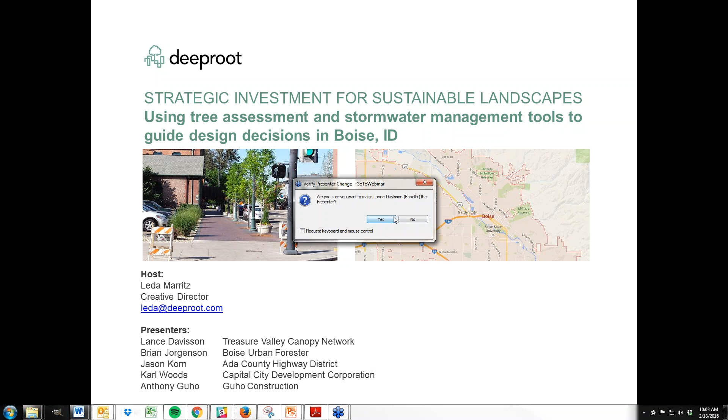The Treasure Valley Canopy Network is a unique partnership in Southwest Idaho where urban forestry and city planning professionals are working together to use an urban tree canopy assessment to inform strategic and sustainable urban forest investments in local cities. Today, we welcome 5 partners from the network. We'll start with a presentation from Lance Davisson, who coordinates network activities at a regional level. Then we'll hear from Brian Jorgenson, Jason Korn, and Karl Woods, who are working together from a city planning perspective within the city of Boise. We'll end with a presentation from Anthony Guho, who manages a local construction company that is installing sustainable urban forest infrastructure throughout the city. After that, we'll have that question and answer period I mentioned earlier.

So now I want to welcome Lance Davisson. Lance is the owner and consultant for the Keystone Concept and has been coordinating Treasure Valley Canopy Network activities since 2012. As you learn throughout the presentation today, the network is involved in a number of activities in addition to informing strategic investments in sustainable landscapes, including energy conservation, clean air, and urban tree canopy links to human health. Lance, take it away. Thank you very much, Leda.

So I get the opportunity to lead off for all of our great partners that have joined this presentation today and give you an idea of where Boise and Idaho's Treasure Valley are located. This is a picture looking from the foothills down into Boise. We have about a 16% urban tree canopy in Boise. If you look, we're located in southwestern Idaho, right on the border with Oregon.

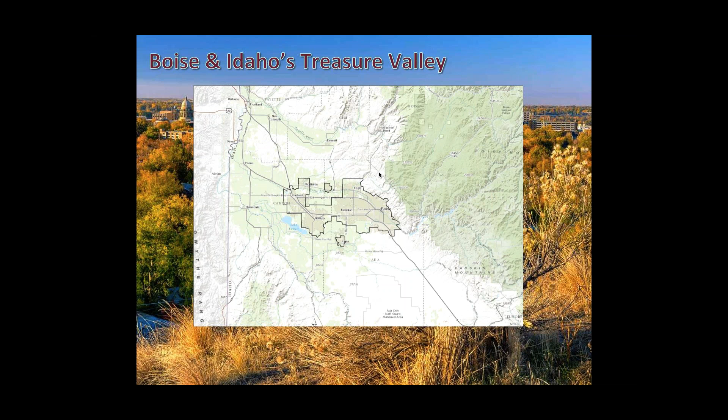If we zoom in a little bit, we have 9 different municipalities within Idaho's Treasure Valley in 2 different counties. The population of this area is around 600,000. Most of today we'll be focusing on the city of Boise. So this is zooming into the city of Boise, and then we'll really dive down into downtown, which is right in this area.

So first I wanted to expose you a bit to the Treasure Valley Canopy Network and how everything kind of evolved. Back from 2009 to 2011, a group of partners were generating ideas around what benefits urban tree canopy provide to our communities in the Treasure Valley, and they recognized that we didn't really have that data here locally. So led by Idaho Department of Lands and their vision for conducting an urban tree canopy assessment and combining that with ecosystem services data, we wanted to help our communities inform strategic urban forest management on the ground.

So together with all the partners, Idaho Department of Lands secured funding from the U.S. Forest Service. And once that funding was secured, we were able to bring on a few consulting companies to help manage the project. We brought in PlanIT Geo, a geospatial assessment firm out of Colorado, to help do the urban tree canopy assessment. By 2013, the assessment was complete, and this assessment also brought in all the data from a region-wide iTree ecosystem services analysis, developing over 21 gigabytes of GIS data, urban tree canopy data, and tools that can inform not only regional urban forest management, but also each of our cities.

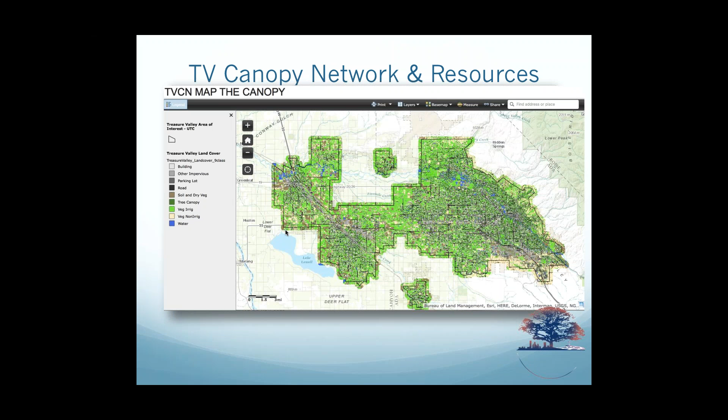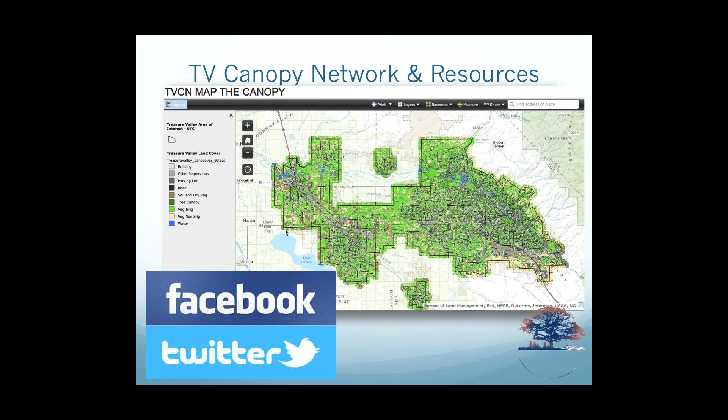At TV Canopy. And we'll continually update this tool for our communities to use and hopefully inform similar ideas around the country. A few more resources that we've created to help community leaders understand the benefits of urban tree canopy, and citizens, are some focused infographics.

This one is around the benefits of energy conservation if we plant our trees in the right location. We have a look here at some of the ecosystem services provided. This is at the Treasure Valley regional level. And then we also took a focus on urban tree canopy and air quality.

And how that benefits human health. So to wrap up here, the key pieces for our network are the core group of partners. The partners you see here have been involved since the beginning. It's important to understand that they're public, private, and nonprofit partners, which serves us well as we grow.

We've been fortunate to become engaged in some urban renewal work, and have partnered up with Idaho Smart Growth and the local green building chapter. We've also now started to form unique partnerships with some economics groups. We've been able to partner up with Deeproot, who provides the technology to actually implement this strategic urban forest investment on the ground. And also you'll learn a little bit about some of the construction companies that are doing great work here locally.

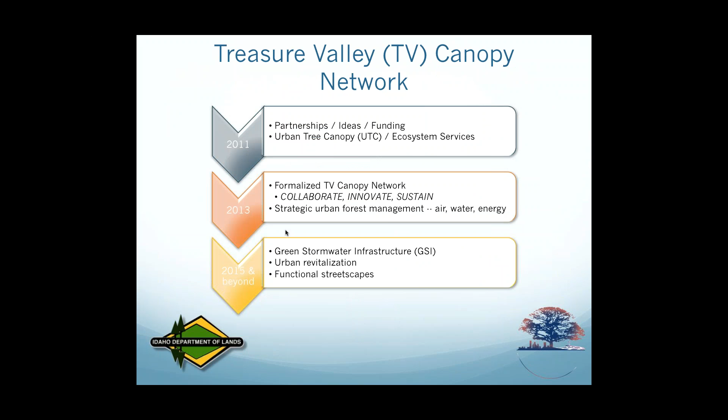So now, to wrap up here, we're now going to step into looking at a local level how we're informing green stormwater infrastructure, urban revitalization, and really that development of functional streetscapes.

So it's my pleasure to introduce Brian Jorgenson. Brian is Boise's city forester. He's been a city forester since 2007 and is a certified arborist. He manages a program that was established back in 1952. They have about 40 to 50,000 public trees and about a million dollar annual budget. Brian will help you understand a little bit more about our downtown streetscapes.

That's correct. Thank you, Lance, for the introduction. I'm going to spend a little time, just to finish out this slide here. Could you go back one, Lance, please? I'm going to spend a little time just talking about the downtown tree canopy.

We've got about 2,500 public right-of-way trees downtown. The urban tree canopy in the downtown portion of Boise, the neighborhood downtown of Boise, is sitting at about 18%. That also includes parks. The urban core, when we exclude one of Boise's biggest parks, Julia Davis, and the greenbelt along the river, we come in at about a 10% urban tree canopy. That's what UTC stands for. Okay, you can go ahead now, Lance.

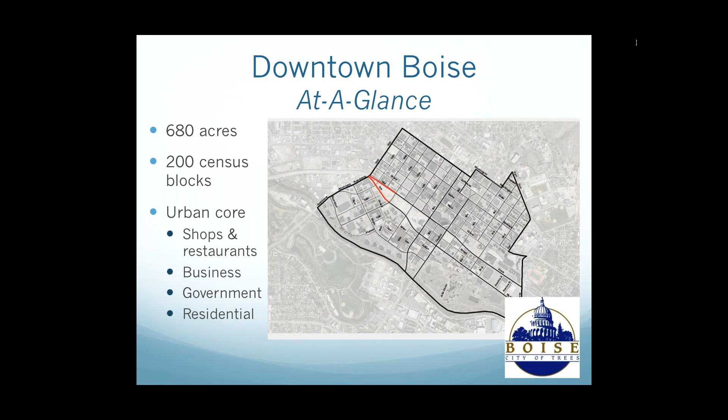So here's zooming in a little bit from Lance's City of Boise look, zooming into the downtown core, the downtown neighborhood. It's about 680 total acres, 200 census blocks. The core consists of lots of shops and restaurants, and of course a lot of business, commercial. It's where most of the city government and the state government operates out of downtown Boise. And there's been a big push in the last 10, 20 years to reintroduce some residential living downtown. Go ahead and click to the next slide then.

They're highlighted in green. I'm layering different things on the map here. So highlighted in green, you see in the lower right corner is Julia Davis Park. It's one of the oldest parks in Boise. And along the lower left of the downtown area is the greenbelt. There's a few other smaller pocket parks and small parks scattered throughout downtown as well. We excluded the urban tree canopy for those parks because it's such a big chunk of it.

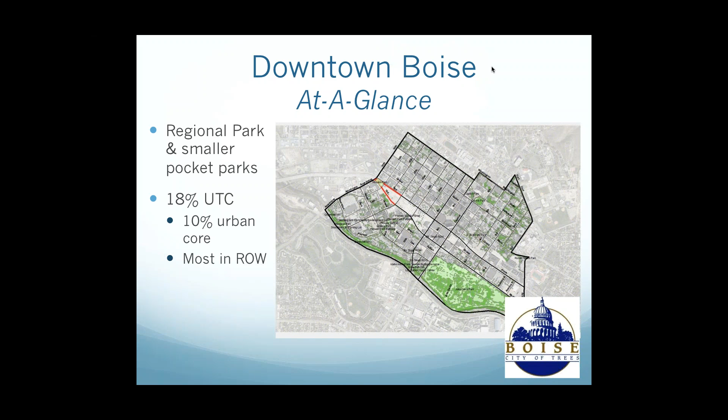I just wanted to look at what the canopy value is in the urban core, where the downtown trees, most of it is in the public right-of-way, and I see Lance has advanced the slide here again. The dark green is the tree canopy, at least as it looked in 2011. So you can see definitely there's a big portion of that in the parks and along the river. And most of the stuff in the urban area is on public right-of-way, which falls under the City of Boise's tree ordinance. The trees in the public right-of-way are managed by the City of Boise, kind of in partnership with the adjacent property owners.

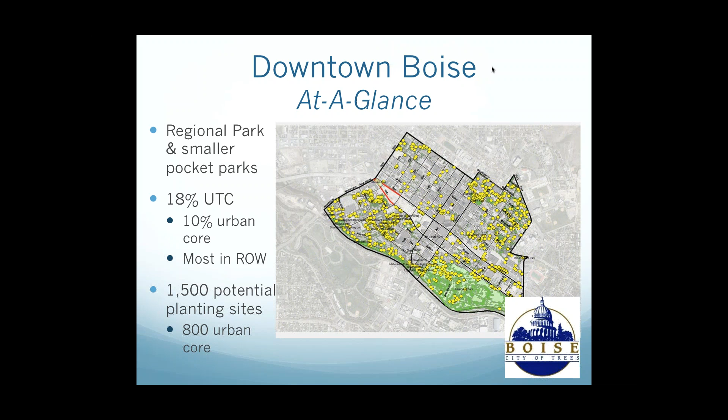On the next slide, we're going to add one more layer. These are the potential planting sites identified during our urban tree canopy analysis in 2011. There are about 1,500 potential planting sites total, with about 800 in the urban core. These are in existing green spaces as of 2011 when the aerial photography was done. It does not include areas that are currently gray infrastructure, like sidewalks and parking lots, where there might be some opportunities later on too.

Okay, you can go on to the next one. So just to give you a little bit of history of downtown trees and downtown tree canopy, that'll hopefully help lead into some of the other aspects of our talk today.

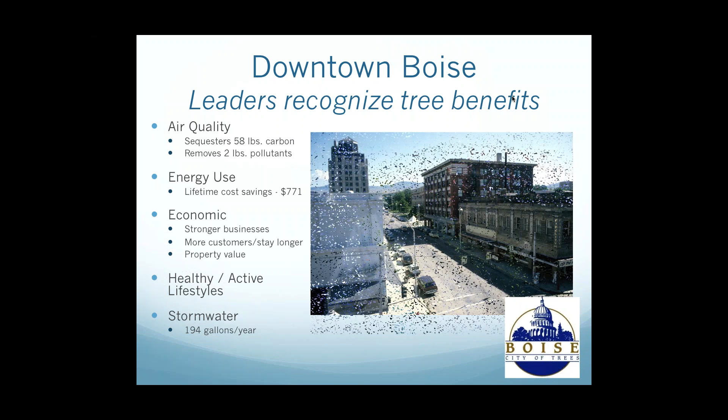Okay, you can go on to the next slide. So here's a picture of a portion of downtown Boise, South 8th Street, in the 1970s, and then through Capital City Development Corporation's foresight, working with community forestry at the time - this all took place before me coming to the city - you see the transformation of this particular downtown streetscape.

It's made a huge difference in the livability and walkability of downtown Boise. We have a very vibrant and alive downtown, and I think our current leadership at City Hall has really started to recognize this. At about 2010 to 2013, I was asked by the mayor's office what we could do to create bigger trees downtown. The answer was pretty simple: we need more soil volume. We need a place for tree roots to grow so they can get what they need to grow to a more significant size and offer those ecosystem benefits.

That Lance mentioned, some of which are lined up on the left side - I won't go into detail on each one, however. The objective is to create a stronger economy, keep people living, working, and exploring downtown, and create a healthy and active lifestyle. Finally, the stormwater element, which Jason Korn will go into shortly, was also a very important driver of the canopy for downtown.

Okay, I think I have one more slide. So the objective here in creating a strong urban forest presence downtown Boise was to create a place for trees to grow, which would bring people and use suspended pavement systems like Silva Cell, DeepRoot Silva Cell, and our downtown core should make that happen. That's about all from my presentation.

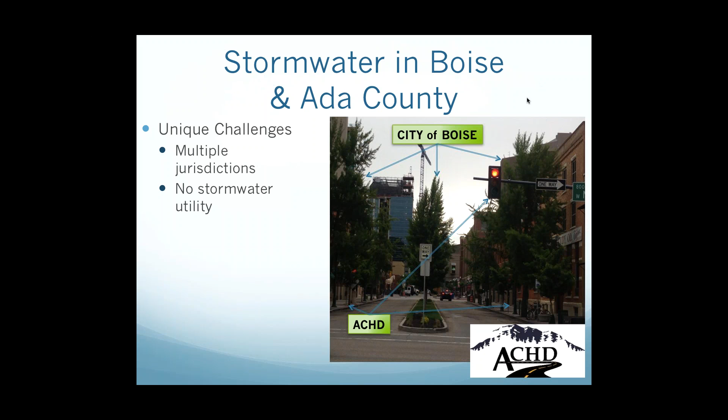Management of stormwater runoff from the Boise area comes from general funds, as we don't have a stormwater utility. Fortunately, there's a mechanism that aids in our collaboration: ACHD and the city of Boise, along with Idaho Transportation Department, Boise State, Drainage District 3, and Garden City are co-permittees under a Phase 1 MS4 NPDES permit, issued in 2013.

Our permit requires, similar to a lot of Phase 1 MS4 communities, on-site retention of stormwater and runoff reduction for new developments, with off-site mitigation where on-site retention is not feasible. It also requires construction and monitoring of 3 green stormwater infrastructure pilot projects and development of subwatershed plans.

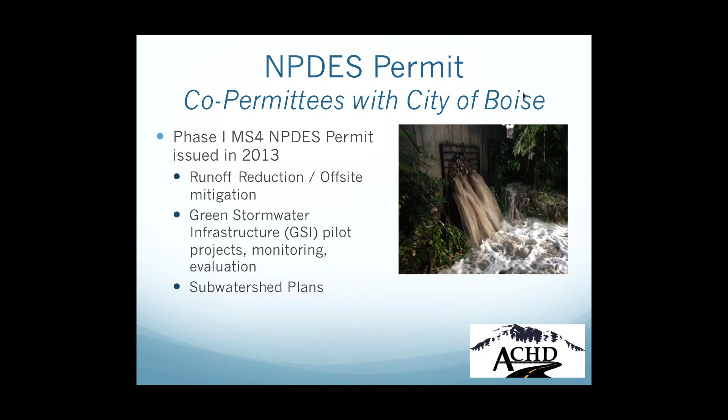In 2014, ACHD completed our toolbox of GSI techniques that we deemed appropriate for use in the right-of-way. These include bioretention, bioswales, permeable pavers, and stormwater tree cells or suspended pavement systems.

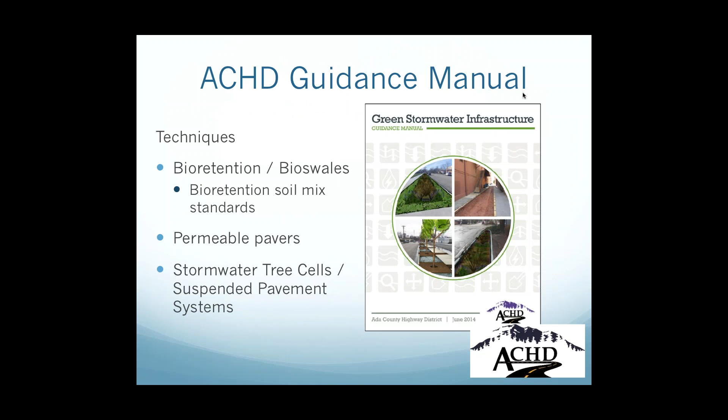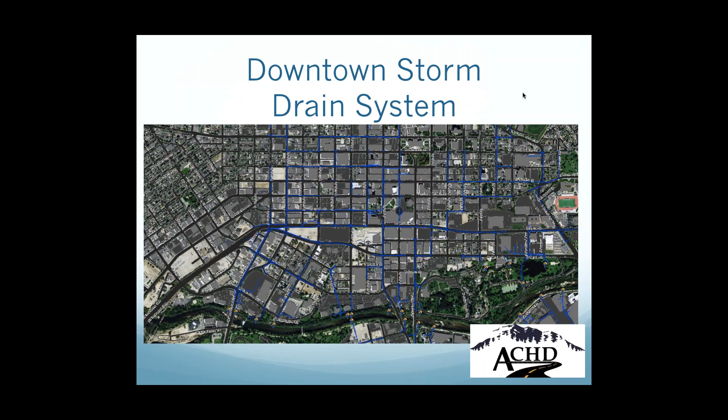Focusing back on downtown Boise, the storm drain system here drains a large impervious area of the downtown core. This runoff is largely untreated, going directly to the Boise River through a series of large pipes, mostly down the main arterial streets. Some of these pipe sections are already over capacity, and traditional stormwater treatment options such as retention and detention ponds are not feasible in the urban core, for obvious reasons of space and expense.

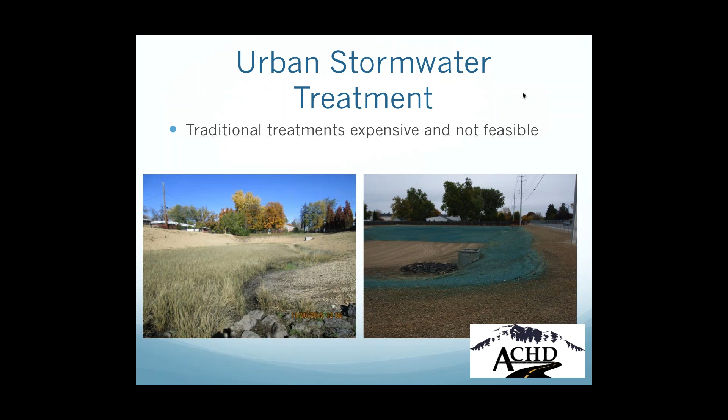Development densities for new developments usually limit on-site retention options for private developments. As we expected to see more installations of these stormwater tree cells, we felt the need to develop criteria to help guide the different scenarios we're seeing through the permitting process, whether they're agency or developer initiated, have a runoff reduction component, or are being used as part of an off-site mitigation requirement.

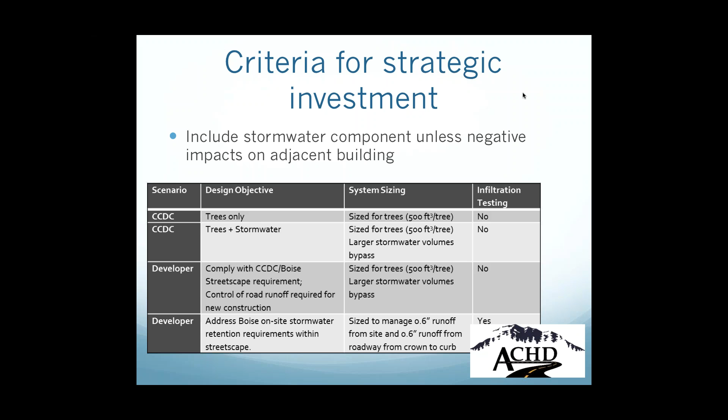CCDC is including the stormwater component on any new silva cell installations in their streetscapes where it's feasible and doesn't negatively impact adjacent buildings, whether they have foundation issues or basements. We generally don't install stormwater components in those situations.

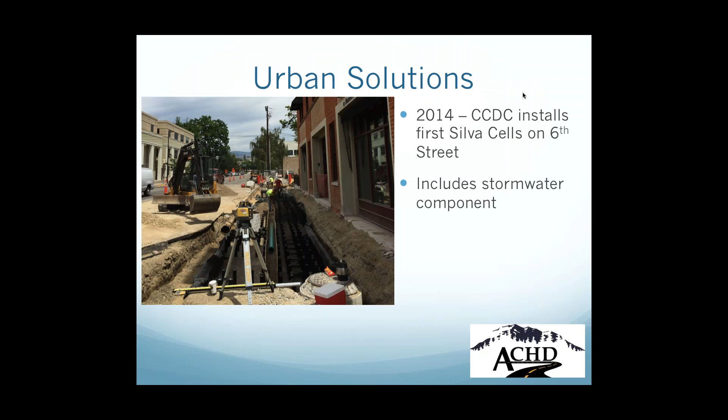Construction of streetscape improvements on 6th Street from Idaho to Main Street was completed in September 2014. These streetscape improvements included silva cell systems for enhanced growing conditions of the street trees, and also included stormwater components that allow us to achieve some runoff reduction.

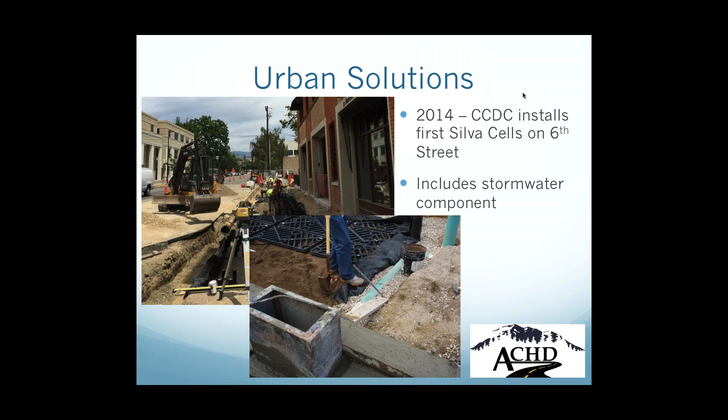This picture is a silva cell installation on Main and 15th that was installed this past summer. We're monitoring this installation as part of our GSI pilot project program.

This installation, and all the previous installations, do not utilize an underdrain. Rather, there's pretty well-draining material in the base of all these, so any overflow would simply bypass the drop inlets and move on down to enter the rest of the traditional stormwater system.

We're monitoring this—there's a camera mounted to the light pole that we're using to record storm events and try to identify what level of storm events might cause bypass of these systems. As of to date, we have not seen any bypass of the catch basins. They've taken all the water, so they're performing quite well, better than predicted, in controlling the runoff.

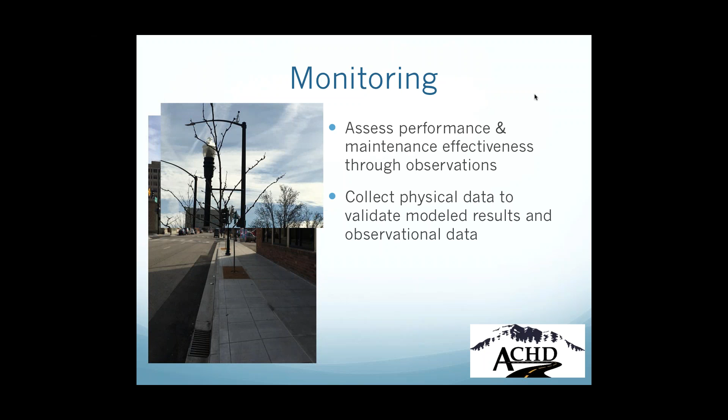We're also working with our co-permittees on developing 2 subwatershed plans in the downtown Boise areas. These are the Main Street subwatershed, which is the west downtown area, and the Americana watershed, one of our biggest storm drain areas, which encompasses a lot of the foothills, north end, and a big portion of downtown.

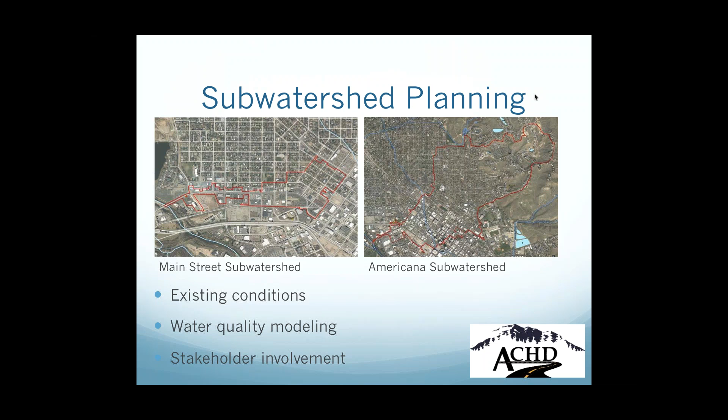In these watersheds, we're also conducting stormwater monitoring, with monitoring stations near the outfalls of both areas. As part of the planning process, we've developed existing conditions and stormwater models for this area that we can compare to our actual monitored results, and divided these watersheds into further sub-areas, utilizing stakeholder involvement in prioritizing these sub-areas for watershed improvement projects.

The goal of this subwatershed planning process is to identify locations where strategic planning and stormwater controls will improve water quality in the Boise River. We intend to use this information to help guide the further use of green infrastructure techniques and sustainable landscapes in the downtown core.

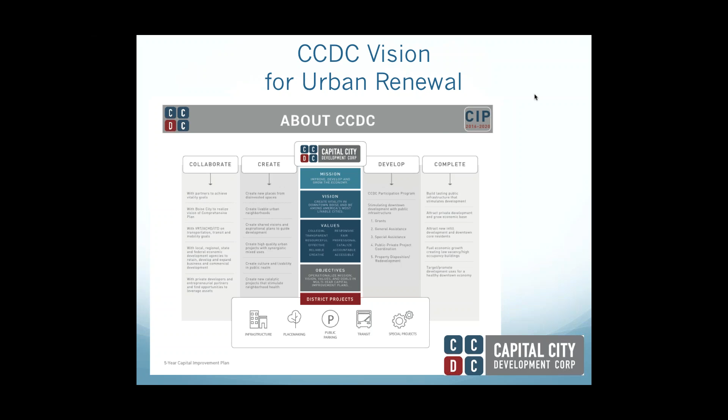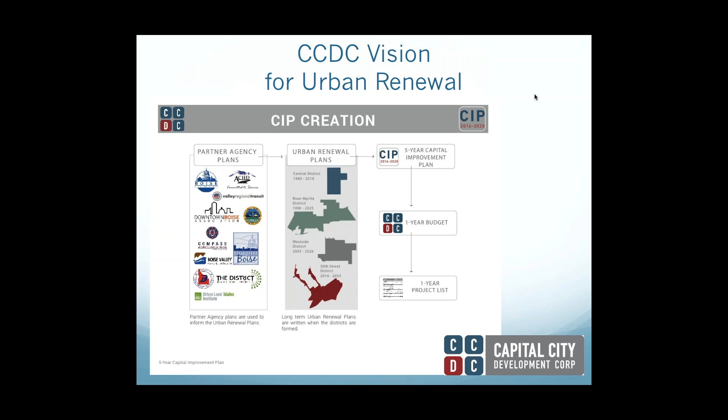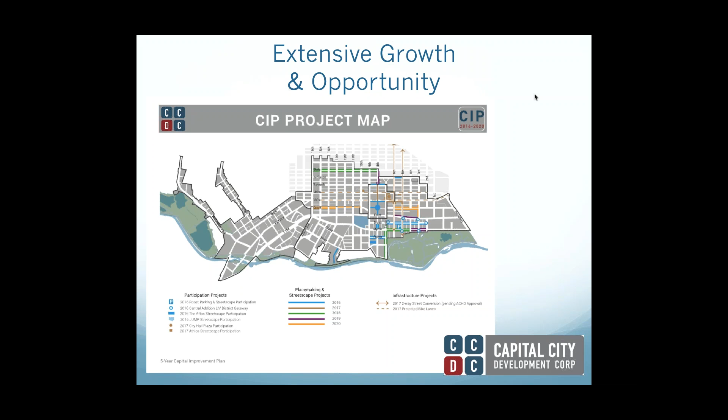So we work to improve downtown infrastructure. One of the ways is repairing and widening sidewalks, adding amenities like trees, benches, and streetlights, which strengthens downtown Boise's vitality, beauty, and promotes economic development. This is a bit of a case study of a streetscape this past summer in the River Myrtle district.

So we work with design professionals. In this case, it was Jensen Belts and Quadrant Consulting to work with partner agencies, stakeholders, business owners, to develop designs for streetscape improvements that work with everybody's needs. Once those designs are figured out, we get approvals and we go out to bid.

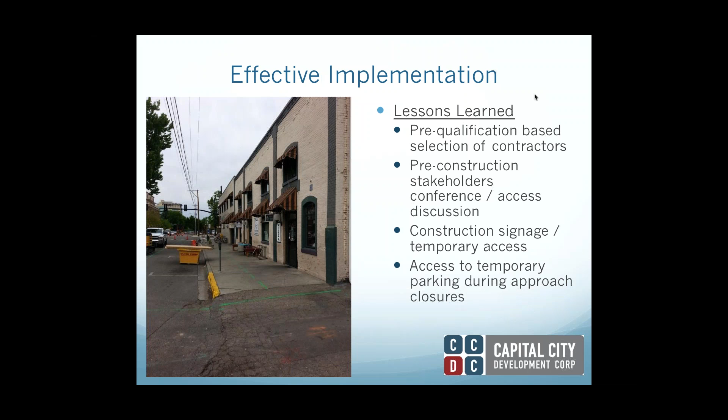One of the things we have learned in the past couple of years with the introduction of Silva cells is we've gone away from an open bid to a pre-qualification based selection of contractors. So we develop a pool of contractors that bid the work to, because it's complicated. It's downtown. You've got a lot of moving pieces and parts.

So once we get those contractors on board, we work with property owners, stakeholders, business owners to discuss schedule to make sure that their access is maintained to their businesses, to make this process as pleasant and the least disruptive possible.

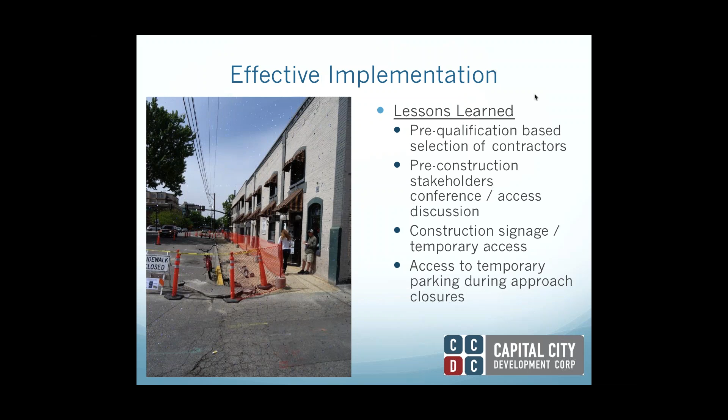So you can see in this case, demo has started. Guho Construction was our contractor last summer. They've already started demo, and immediately they get up a safety fence and they grade out the material in front of the businesses to maintain access and to keep things functioning while they do the work.

This has been critical. They go out every morning, talk to the business owners, let them know what to expect for the day and for the week. They provide construction access signage, as do we, just to make sure that everybody knows what's going on and to try to make it as pleasant as we can for everybody.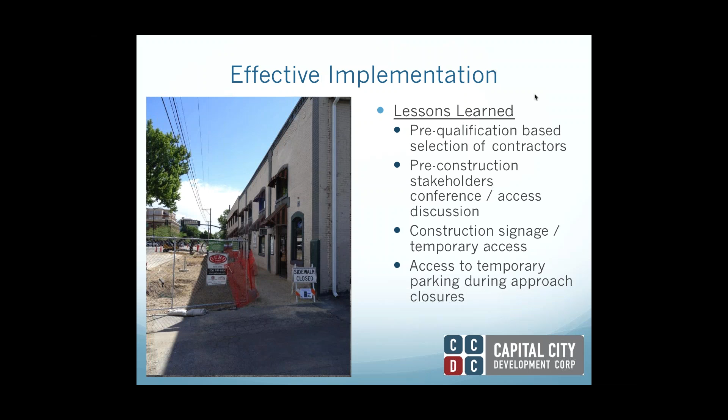Also, sometimes we run into parking lot approaches, and so we need to work with those patrons to make sure that they are aware they have different entries in, or even alternate locations in some cases.

You can see at this point that Guho is doing some fine grading. They're getting ready for the pavers, and so now we have closed this off. We have signage where we're moving patrons through different exits and entries of the building to maintain access. So we keep moving and fine-tuning and modifying access as the project goes along. Let's go to the next slide.

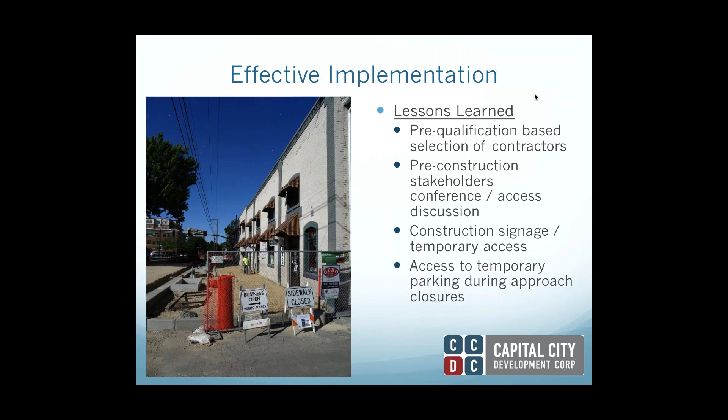From this point, usually just a couple of days, they get all the pavers down, and these guys really fly through this stuff.

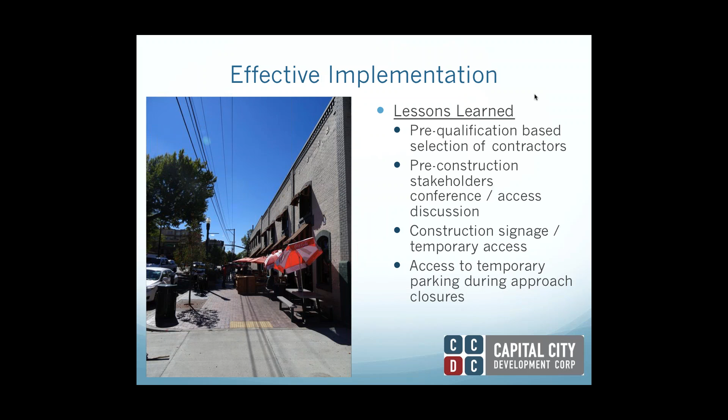When the project is all done, in this case particularly, we were able to increase the streetscape width by 8 feet. On the first slide, you saw an area that didn't have trees, was in disrepair, and didn't have lights for safety or placemaking. Now you have a nice big public space that's highly utilized.

It's very active, it's safe, and it's encouraging people to come down to this part and enjoy these businesses. Let's now hear from Anthony Guho, who was instrumental in the construction last summer. He's a 4th-generation construction manager with Guho Corp, and he's become the resident expert of Silva cell installations, having done a vast number of them. Take it away, Anthony.

Thanks, Carl. So a little bit of background on Guho Corp. We're a general contractor based out of Eagle, Idaho, which is right outside Boise.

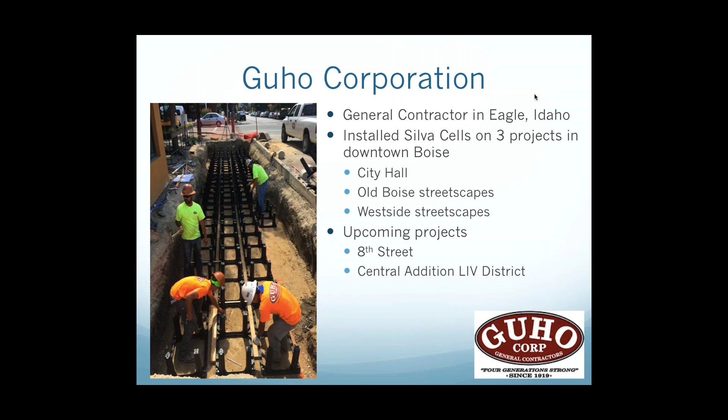We've installed Silva cells on 3 projects last year, starting with City Hall for the city of Boise as our first project, and then we completed 2 projects with CCDC, the old Boise streetscapes and the west side streetscapes. Coming up this spring and summer, we're working on 8th Street streetscapes, and there's a huge LIV District revitalization project going on that's in the design phase right now.

As I said, City Hall was our first project that we installed Silva cells on. We were actually a subcontractor on the overall project. They renovated the whole City Hall inside, and redoing the sidewalks on 3 sides of City Hall was our scope of work. That sort of created a perfect learning environment for the Silva-Cell installation, being part of an overall larger project. It gave us an extended period of time to do the work, and we didn't have a lot of the constraints we've seen elsewhere with business access and whatnot, so it allowed us to learn and fine-tune the Silva-Cell installation process.

A couple of the challenges on it was we started basically construction during winter, starting in November and going through the first part of the following spring. And then as we were getting ready to get started, originally there was no stormwater on the project, and ACHD came to the city and asked that we include stormwater. We worked with ACHD and the city on incorporating some stormwater lines, basically bringing the stormwater into the Silva-Cell system and taking some of that storm runoff out of the existing system.

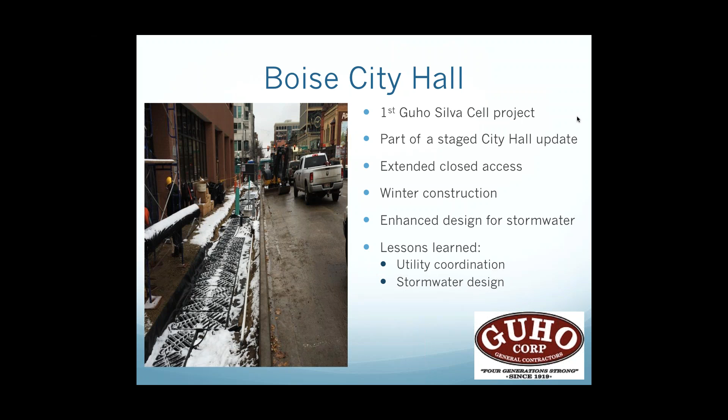So then our next projects were for CCDC, and these were quite a bit different than City Hall. The old Boise Streetscapes project consisted of 4.5 blocks of complete streetscapes, but the major difference here was we were working in front of active businesses all along the way. There's sandwich shops, restaurants, coffee shops, so this was a huge disturbance to their business, and having an efficient construction plan and executing upon that was critical to a successful project.

Overall on the project, we installed about 1,700 Silva-Cell units, and building on what we learned at City Hall, our extensive utility coordination and planning further accelerated the work and minimized any downtime from running into unknown utilities. The old Boise streetscapes were in the historical part of downtown where we were working next to buildings that were 100+ years old, so there were a lot of old utilities that we had to deal with.

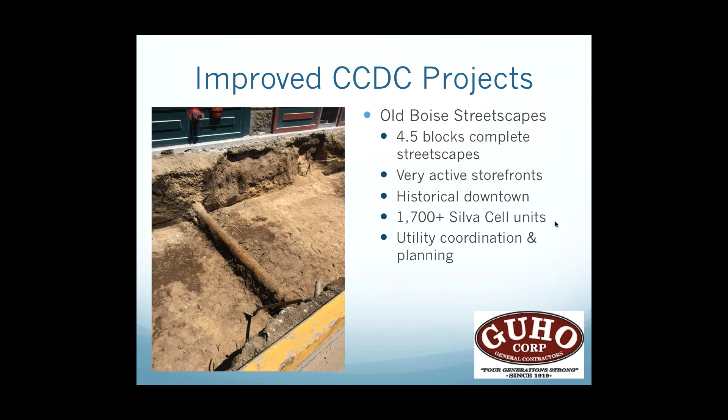So basically, planning for success is critical for these projects, trying to address the problems ahead of time with utility coordination, and like Carl was saying, communication is key. We're impacting the businesses, their customers, and the public that use this for transportation, so communicating our plan with all the different people alleviates a lot of the problems. They know what's coming, they know what to expect, and there are no surprises.

And then we also found minimizing the impact overall through extended work hours and working around the business that we're affecting. For example, this picture here that you're seeing is in front of Flying M Coffee House. Being a coffee house, they're busy early in the morning, so we would schedule our work so that later in the afternoon we would do our work in front of theirs so they could maintain their business and keep going. Basically just taking an approach overall that businesses come first, and if the project creates a big disturbance and everyone's upset about it, the project's sort of a failure.